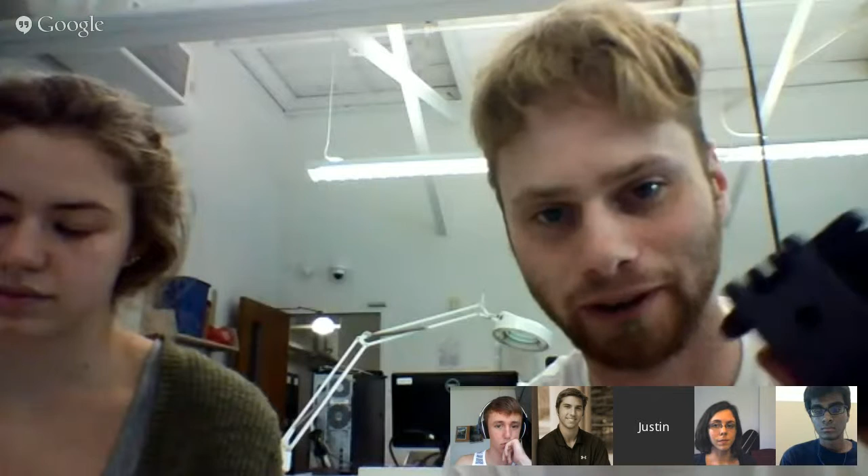All right. Go ahead. I'm just a little curious as to why you picked a hexagon. Is there a particular reason, or is it just because it was handy? Yeah, it's just handy. It's actually not a finalized thing at all. My next step here is to figure out what I'm actually going to be doing. This is like a placeholder basically. But that's kind of what I'm thinking about doing.

But a hexagon versus like an octagon is probably stronger because it won't strip as easily. But I don't know if I'm going to take this route. We'll see. If you have any ideas, let me know. I'll think about some. All right.

With an octagon, I don't know what size you're printing at, but if it's printing too small, then you're not gonna really get the features of the octagon. It's not gonna have anything to catch on, because it might get distorted with the printer. Yeah, that might be another thing to think about. Okay. Hexagon's probably about the right place to land.

For a long time in the early days of printers, we were actually just designing our holes as octagons, because when you print a hole, the plastic kind of pulls inwards slightly because of weird viscous forces. So if you designed an octagon with the sides the distance apart that you want your diameter to be, you ended up actually getting a circle with the right diameter. Yeah. Cool.

All right, that's it for us, unless you guys have anything else. Yeah, excellent progress. Mark, what's the progress on Adam? Is he here? Not here?

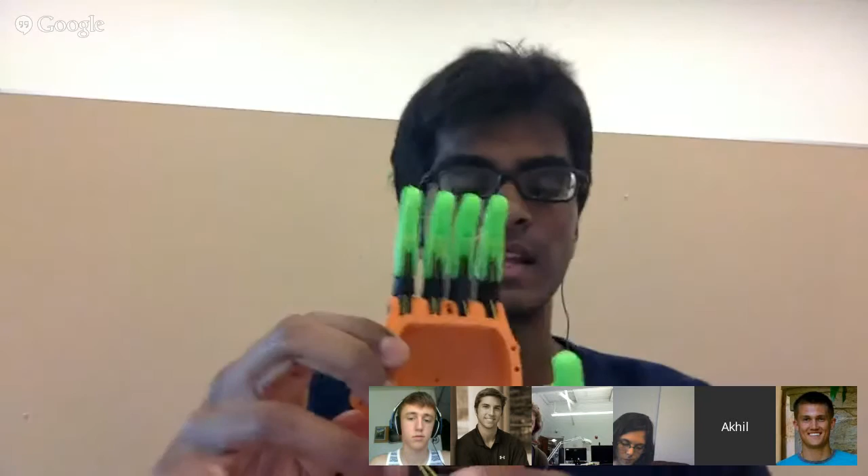Okay. I'll do a quick update on what I've been working on. So I finished a model that basically integrates a lot of the different stuff I've been working on. So this has the Whipple tree box. This has the opposable thumb position, and then it also has the natural wrist tenodesis. So as you can see, I just open and close it, and I don't have a circular object on me right now, but I've noticed that it really adapts to circular grip much better than if you just have

the regular tensioner box. And so, yeah, the next step is to put a ratchet onto the side, which I started. I printed out something, but then the printer decided to under extrude for the whole model. So I'm gonna have to tune up the printer and then print out another one. But I do have a CAD file that I could show you guys. So I'm gonna hop on screen share, and all right. Yeah, so this is basically the general design of the ratchet.

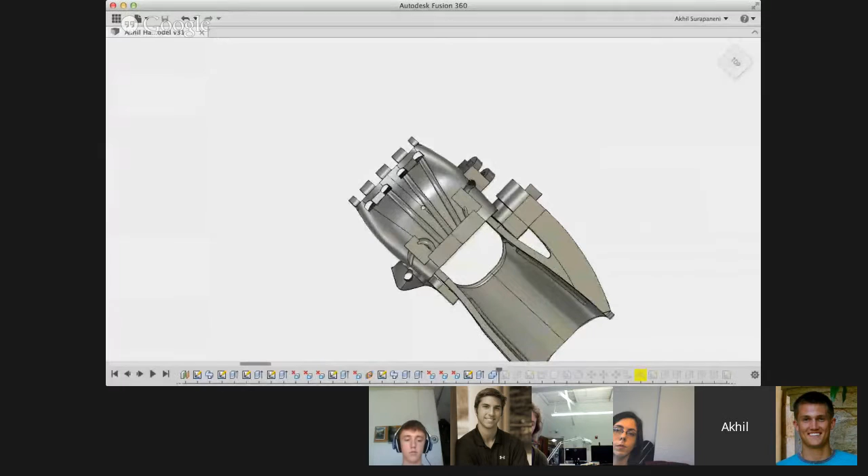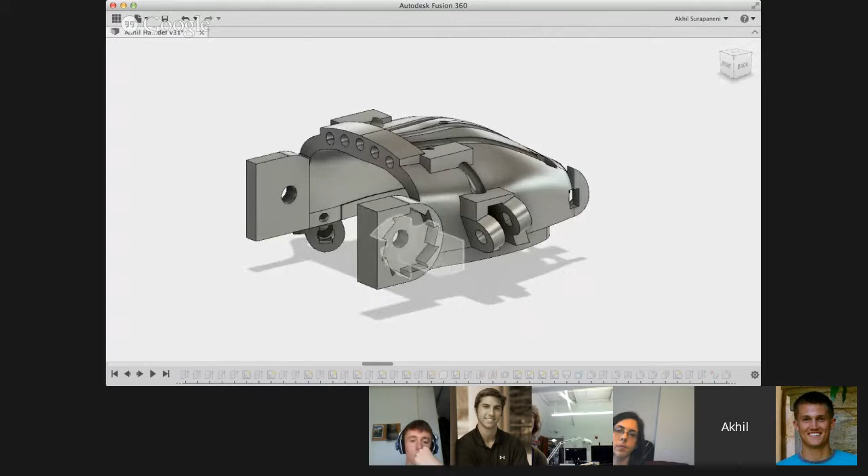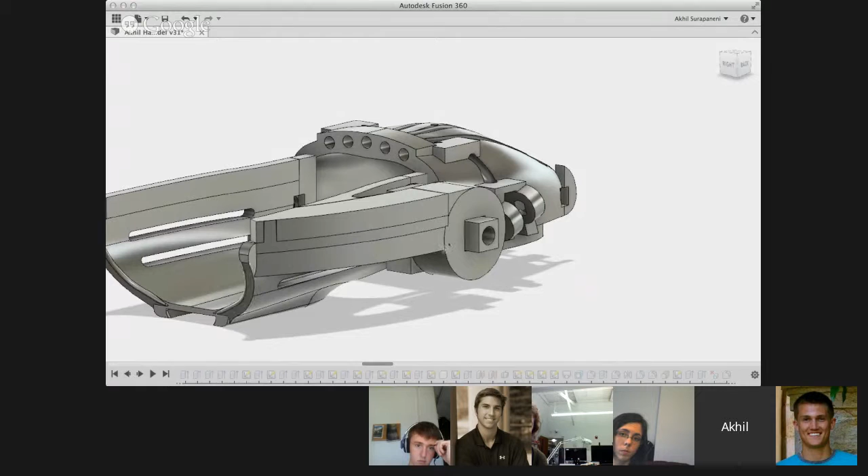So what we have here are several parts. I'm going to start with the palm. So you've got the palm. Onto one of the hinges on the palm, you've got this ratchet right here, and it's basically an indent into the hinge itself, as you can see from this angle. And then attaching to that, you've got the pawl, which attaches to each one of those little indentations, and then the pawl has a pin which comes out to the side, and the pin is important because it's a rectangular pin, and that attaches onto the gauntlet.

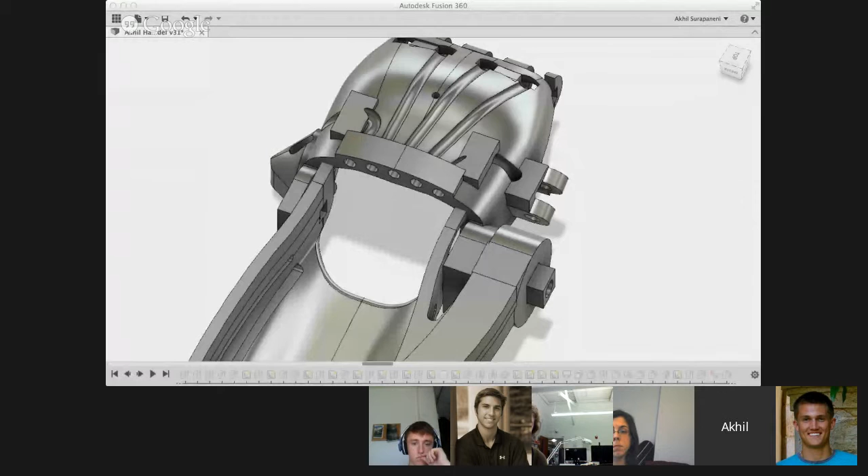So the idea is that you can just slide this pin in and out, and it's basically what I had last time with the pin. However, it's flipped to the other side, so it's not going to impact the patient's wrist as much, or at all, actually. So, yeah, does anyone have any questions, comments?

Yeah, quick question on the area. You have what kind of looks like a three-prong thing. Be very careful, that's going to break instantly. I know you said you tested a couple other things out about stuff breaking, but any force going against it is going to snap it, the way the curvature and stuff is with that. Also, I don't know if you can slim it down. It looks decently bulky, so I'm not sure if you can.

Is it going to be used with the non-affected hand to engage it and disengage it? Then, how's that engaging? So it's going to be engaged by the non-affected hand, to basically push the pin in and out. In relation to the three-prong thing, could you elaborate? You're talking about the pawl itself, right? The one that moves.

Well, okay, so go back to your screen real quick. Yeah. And I can kind of point it out to make a little bit more sense. All right, yeah. So then remove it all the way down to without the pin and without the side thing. So I'll take out the square pin. Take out the pin, okay. Yeah. And then, okay, so when you put the pin back in, what sits inside that gearbox there, so put the pin in.

Okay, see those three prongs right there, right where your arrows are? Yeah. Those are going to snap instantly because they're so incredibly small. You've got to remember when making a hand: is this hand going to be only used for someone in the age group of 10-year-olds and up, so the hands are decently big in size and they're not going to snap, or are these hands going to be able to be made at 100% or so?

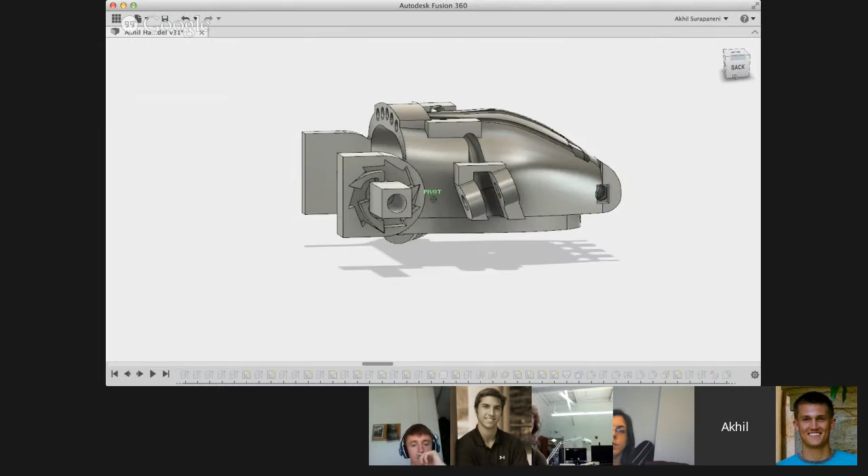Well, this one's at 100%, so I'm assuming that any further hands are going to be made at a size bigger than 100%. So right, if it works now. I guess what I'm saying is, have you printed out a model of this? Yeah, and I printed out the pin, and it wasn't that weak. I mean, I haven't tested everything together, but the pin was able to print out well without the under extrusion problem. And while it wasn't the strongest thing in the world, it wasn't super weak either.

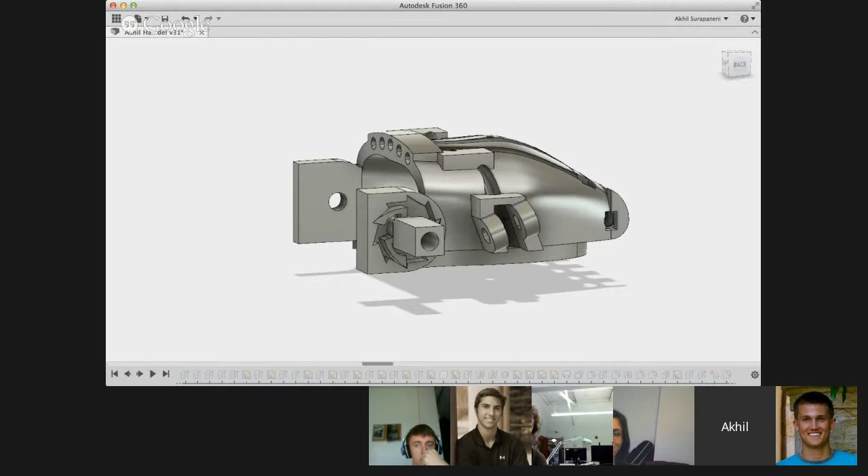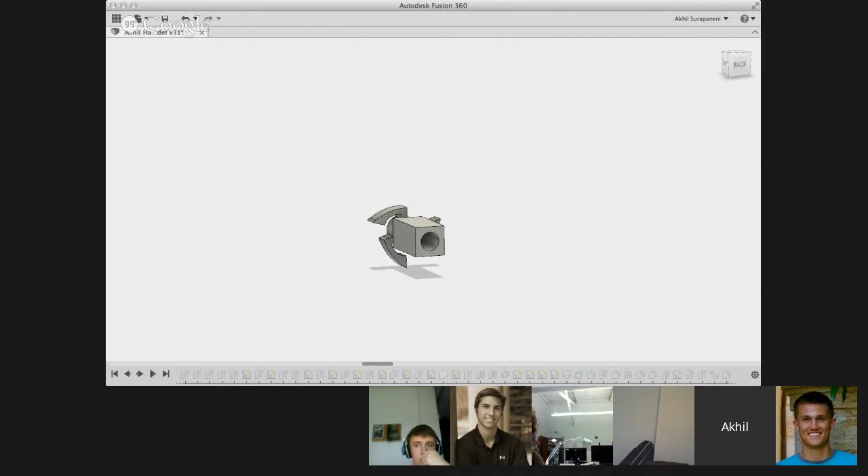What do you mean by not being the strongest thing in the world? Like, what kind of force could you do against it to make it snap? Yeah, so basically I was able to make it snap, so I'll show you. I pressed up against this tip with a strong amount of force on just one tip, and that was what caused it to snap. Okay. So again, it'll just come down to testing, but if it does snap, do you have any recommendations for how it should be designed so that it won't snap?

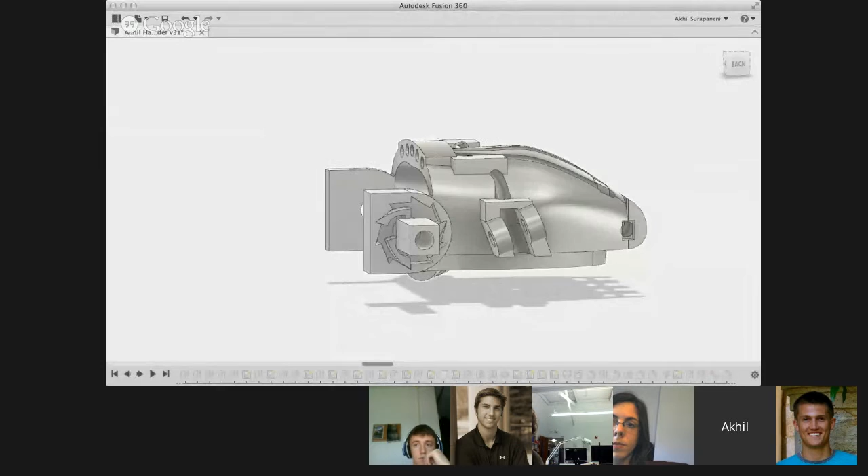Oh boy. I guess just look at your geometry. It looks like there's pretty thin bars and stuff like that. So if you make it thick, I think that's gonna help you out a lot. Because the eventual goal is that the pin itself, so how it moves is, let me just show it to you. Each of these little pieces, the one that's highlighted in blue, is supposed to flex just a little bit. When it moves from this spot to this spot, it's supposed to flex a little bit, and then it's supposed to expand. So the trick is to find a geometry which will flex, but also will not snap.

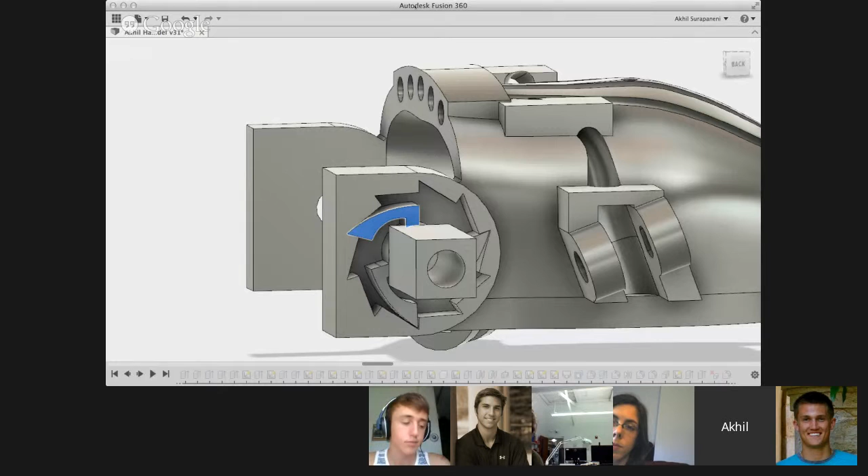So if that turns out to be too weak, you should probably turn your ratchet and pawl inside out and put the pawl on the outside, because I'm gonna guess when you broke that thing, it broke where the L-shaped pawl attaches to the cylinder, or somewhere on the short bit of that L. Which L are you talking about? Okay, so you've got this sort of hockey stick thing for each pawl. So it snapped in this region, right? It snapped right here. Well, actually, on this arc closer to the edge right here.

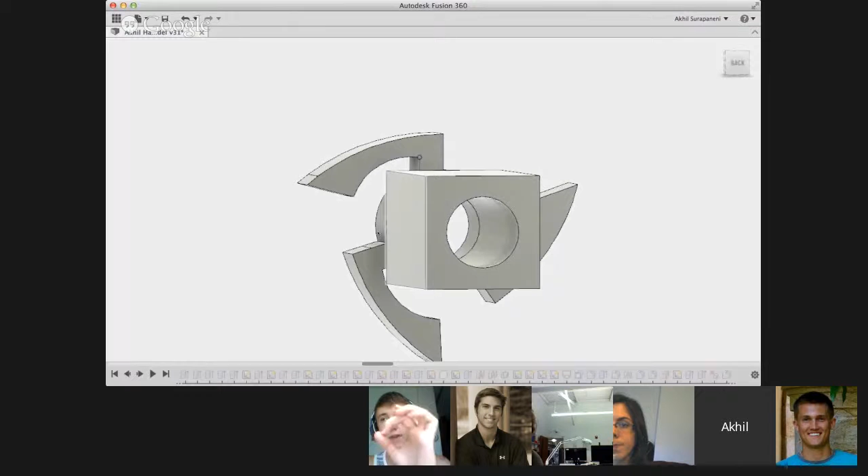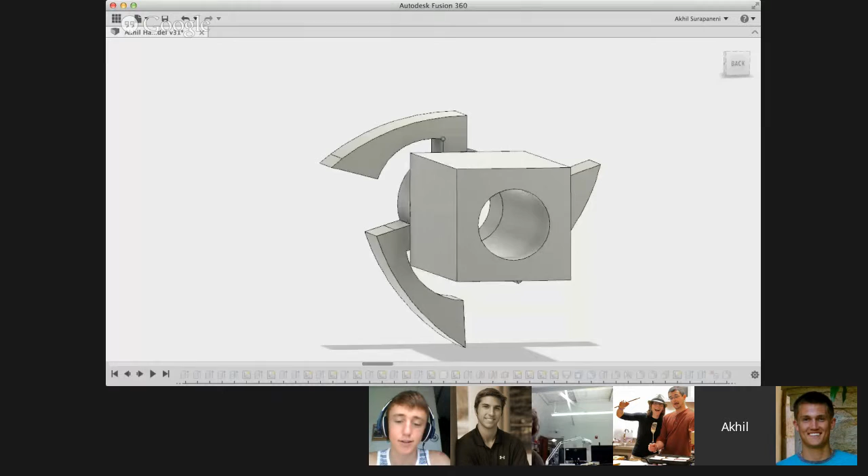Yeah. So that corner is the weak part, and if you have a ratchet with a pawl on the outside, you can just have it going directly into solid material, so you don't need a corner. So you'll probably be able to keep that pretty close to pure compressive loading, which is the one thing that printed parts don't suck at. So basically, you're saying that instead of having the ratchet onto the palm, have the pawl onto the palm, and have the ratchet onto the gauntlet or the pin. Yeah, have the pawl on the outside bit and the ratchet on the inside bit. I'm not sure which one's attached to what, but okay.

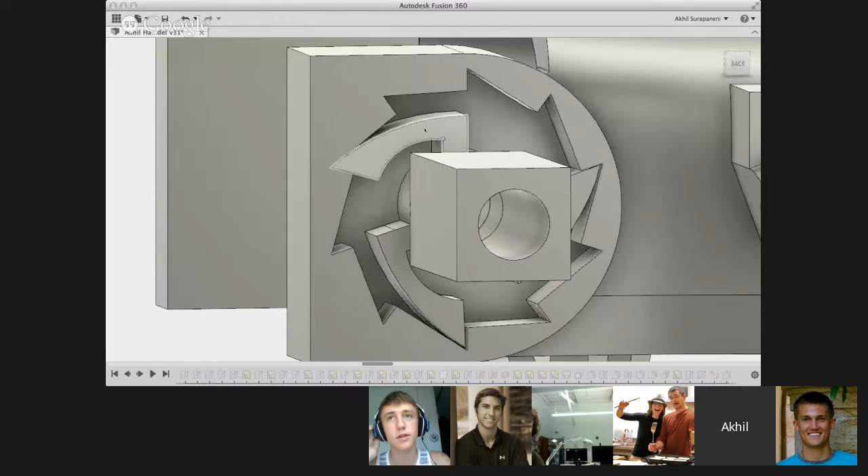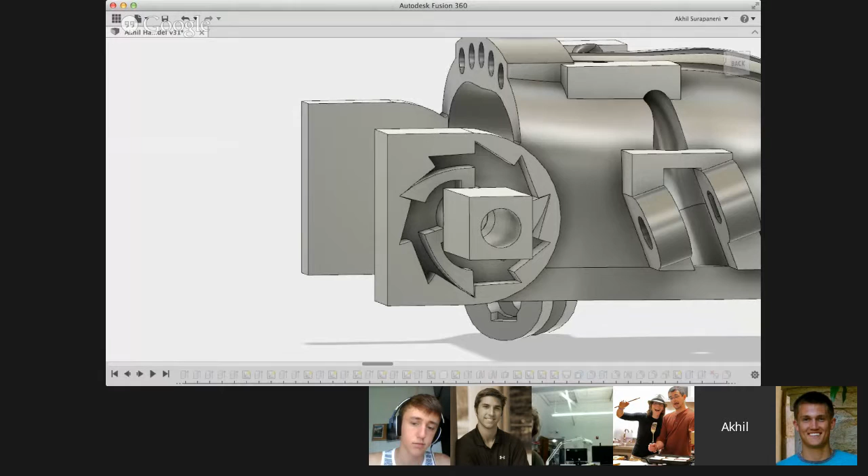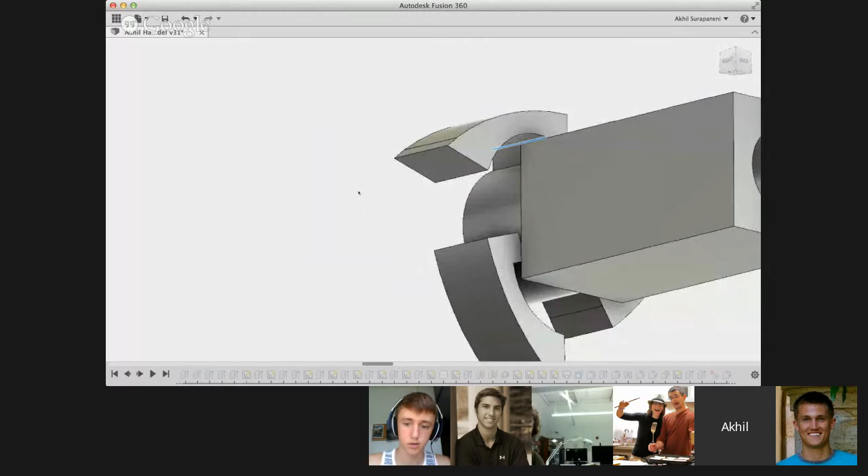The only problem with having the pawl on the palm is that this pawl is supposed to flex. So basically, this whole thing actually compresses at this joint, and so if it's glued on or if it's printed on, then it won't be able to move. It won't be able to flex. And so you may have to pop it in there. Yeah, and so that's why I did it this way. But I guess I could maybe fillet this edge right here, that line. Hold on, see if I can get it. This one right there. Maybe I could fillet that line to avoid problems. Yeah, that might help. Yeah, right now I'm just printing that out as we speak, actually.

Okay, cool. So that's everything I've been working on. Oh, I've been starting to work on a testing rig. Haven't had much time to work on it, but I think after this prints out, I'm gonna move on to that. And the eventual idea is that it's gonna be able to open and close every hand like 10,000 times or something, just to be able to test each design and figure out where the breaking points are, to hopefully in the next iteration make sure that it doesn't fail at the same spot.